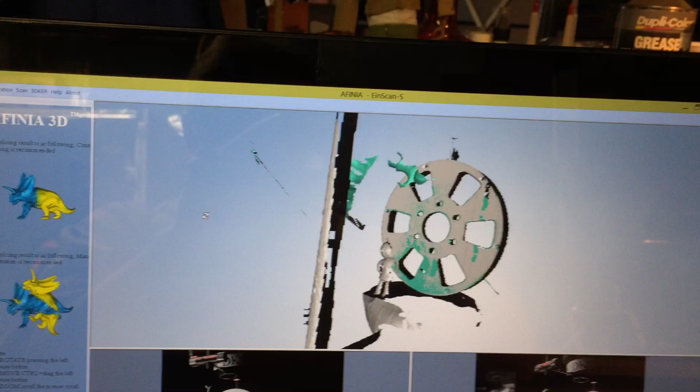Here is an Afinia 3D scanner that I'm going to be putting up for sale on eBay. I really like it. This scanner is made by Einscan - sorry, I pronounce it with my Pennsylvania Dutch accent. This is the same as an Einscan S. In fact, the software at the top says Einscan S on it, and everything that comes with it, including the dongle for the software, says Einscan on it.

This comes in a plain white box, just like a generic scanner, but you can see who it's made by. It was sold under the name Afinia 3D.

There's probably a whole series of videos I could make on this scanner. I'll show you what I'm doing with it now. I wanted to play with it a bit before selling it. I'm selling it because my main scanner is a David scanner, which has now been taken over by Hewlett-Packard - I hope that's not the demise of that scanner, because I really like it a lot. But I bought this one to play around with, and it's the exact same concept.

There's two cameras and a video projector. This scanner is actually recognized by David version 5 software, even David version 4. The difference is version 4 only picks up one of these cameras, while version 5 is capable of using two cameras - it picks up both cameras in its drop-down menu, and the video projector in here is detected too.

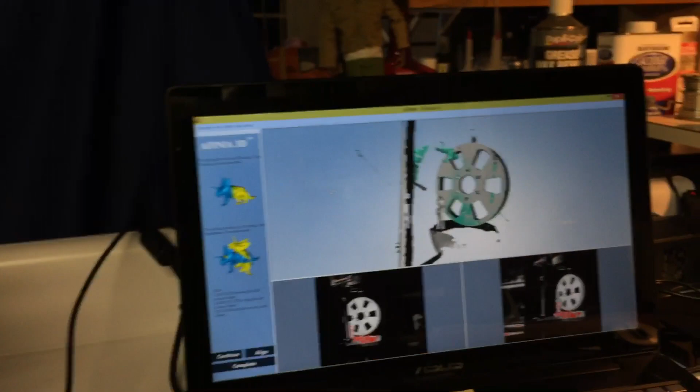But if you want to try some different software, you can probably find David version 5 on the internet and download it for free. The only difference between the free version and the paid version is that you can't save your project. You can try it out and do whatever you want, but you can't save it - so it's good for learning the software, but not much else, since you can't save what you spent all that time scanning.

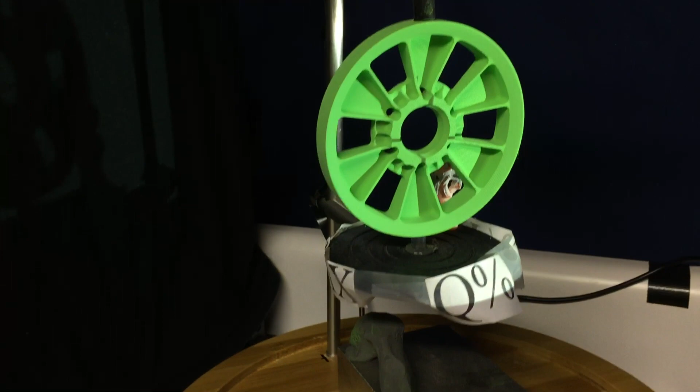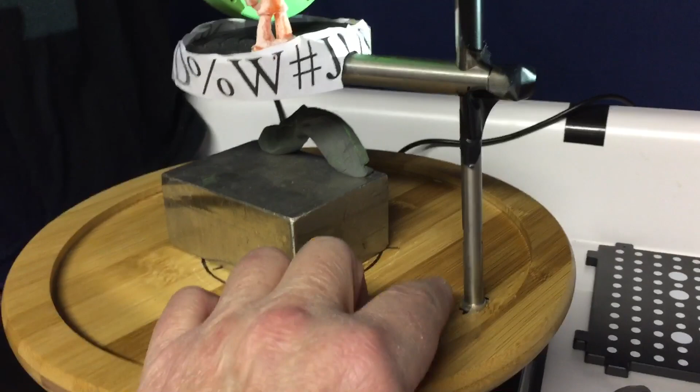Now, if you look at this mess here, you might ask what I'm doing. Well, this is my manual turntable that I was playing around with. This is just used as a weight - it's a cheap couple-dollar wooden turntable that I adapted. This piece is from a Next Engine scanner, because I have an extra one - I've also tried Next Engine scanners. This is from a Next Engine scanner where I'm holding the part.

This does not come with the Afinia Einscan scanner package. I do have the turntable, which is also marked Einscan - or whatever you want to call it, 'any scan.' So this table works fine, but in this case I've been trying to scan this wheel center.

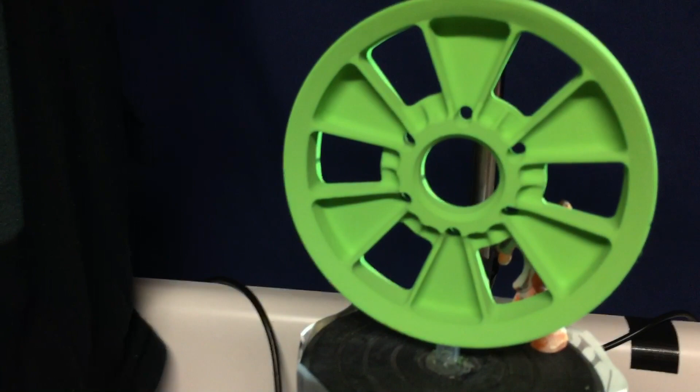This wheel center is actually made out of aluminum, and it had some reflective surfaces on it. So let me go over to my messy workbench here.

I spray the items with this - Heidi Swap spray, not Heine Swap, it's Heidi Swap. This is a chalk spray, and this stuff is great. I haven't found any difference between the colors at all - doesn't matter if you use green, white, whatever. I got green because it was cheaper, $9 a can versus $30 a can for white. I've tried many different colors, and it works great for dulling the part, and it washes right off. Hasn't damaged anything I've put it on so far.

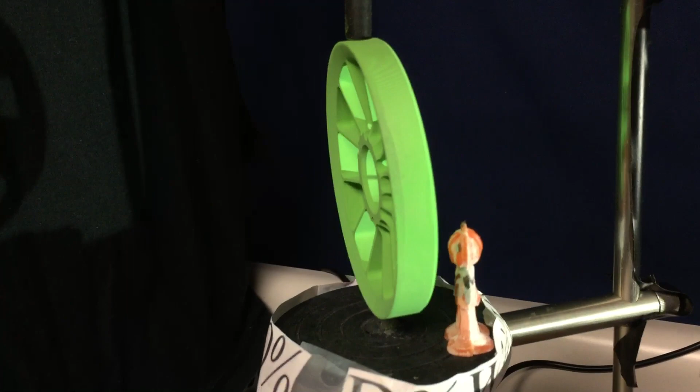So the idea of my contraption here is that I don't care much for the manual alignment in this software. So I'm putting things in the scan that are easy to remove in post-processing. Put things in that are easy to remove in post-processing, but they give the scanner something to reference to when the software does an alignment.

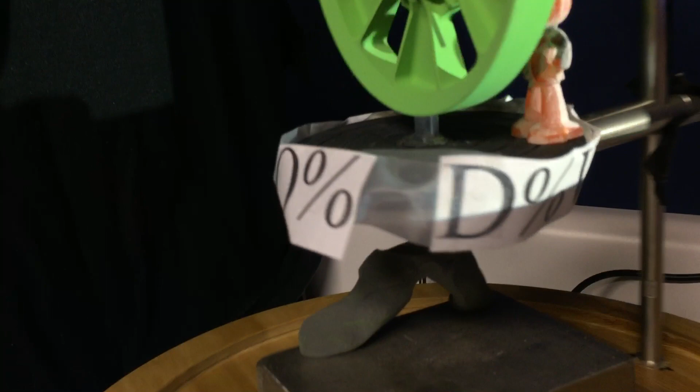This is something else I haven't seen anybody really talk about, but it works. This is just something I printed out on the computer - totally random symbols, numbers, whatever. But it helps the scanner software find items to line back up again.

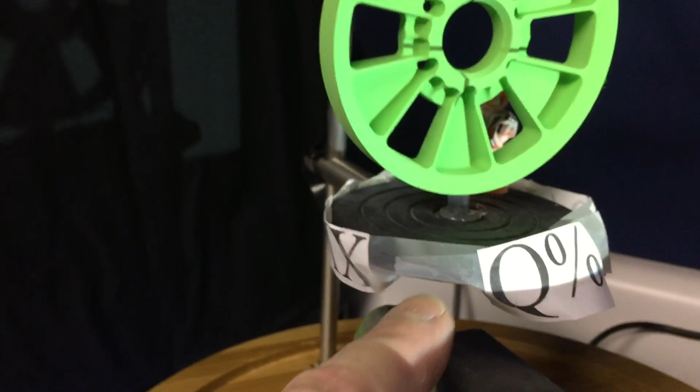I've had some problems scanning the back of this wheel, and it's because - as far as the software is concerned, since this is like a symmetrical item, the software might take this opening in the wheel and stick it over here, orienting it in any different direction. So you almost have to tell the software what to do by putting easy-to-remove items in with it. That way you're giving it reference points without putting stickers or markers on your actual item.

So I'm going to turn this light out. What I wanted to show here was a scan that I just did, and the software didn't line up correctly. So I want to show you what to do when the software doesn't line up correctly.

You can try to do a manual alignment, and there'll be instructions along here. I don't really care for their manual alignment that much. I'd rather skip off, reposition the item, and go to another scan. That seems to be a time saver.

But I'm going to show you here how not to delete your whole project. Just delete your last scan, which is denoted by this green area. This is my last scan.

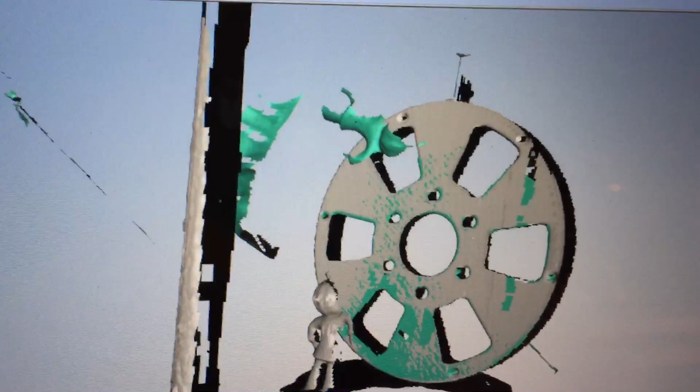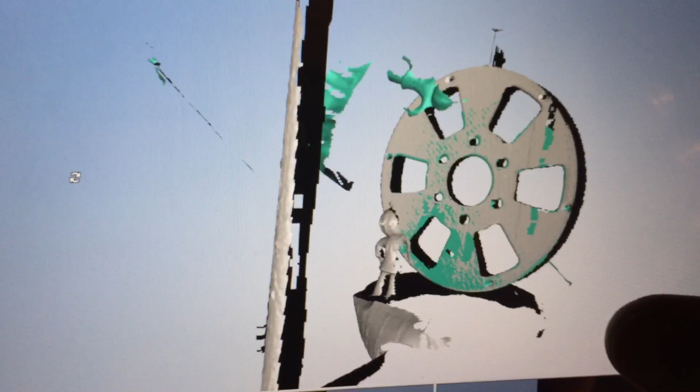The software grabbed it. It should have put the little pumpkin guy down here, but it didn't. It lined up these holes instead, since that represents the major part of the scan, and that happens sometimes with a part like this. A part like this is very difficult to scan. If you're doing a little toy soldier figure, or just the pumpkin guy, that works great because there are a lot of defining features on that item. This one is uniform in shape and really has no defining features.

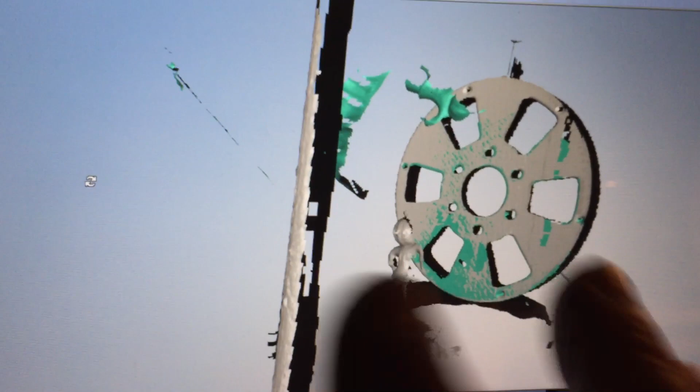So again, sorry for repeating myself, but that's why I put items in with what I'm scanning that are easy to take out, because in post-processing, when you trim this, it's easy to take out the things you don't want. Adding things into your scan is okay as long as they're not actually touching what you want to keep, because I could edit out the little pumpkin guy, but he's there for a reference point for the software.

So if I want to remove that in this software, all I need to do is click Align, and that brings me into this screen where you can place reference dots in one spot and then reference dots in the same spot.

I was just going to skip over this, and I just want to delete this last scan here. So let me think here what I do. I don't hit Complete. I clicked on Align, which brought me into this screen. Now this is your alignment screen where you can put the dots on either side.

I have to refresh my mind because I was using the David software as well. Now, when you click on Delete Model in this alignment screen, it is not going to get rid of your whole project. You don't have to start over again. You just want to get rid of that one scan that didn't align, so you click Delete Model. That's going to take you back to your screen.

Let me zoom in on this. That removed just that last scan. So we can give this a try again.

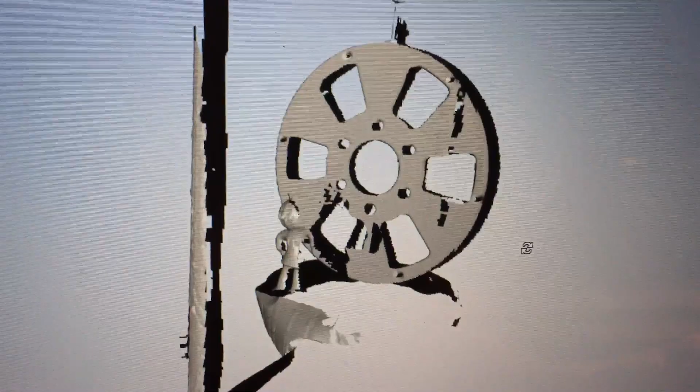I'm going to do this quick before I end the video. We're going to spin this back around and try this position. This seems to be where I'm having trouble, when I'm getting past the halfway point on the back. This is what the camera is seeing - that's what one camera is seeing, and that's what the next camera is seeing. Let's scan this and see what happens.

So we're going to click on Continue. Now we're going through the stripes of the scan. It's a structured light scanning system.

David software, which is Hewlett-Packard, works pretty much the same way - even the light patterns look the same. I've always wanted to try Flex Scan, which is another type of structured light scanning.

Okay, now the next screen's going to show me the scan it just took. When we click Next, the software is going to do an automatic alignment, and we'll see what shows up for the next picture. It didn't align it again - I can see here that it put the little pumpkin guy up here, which should be down here. So I might try a manual alignment.

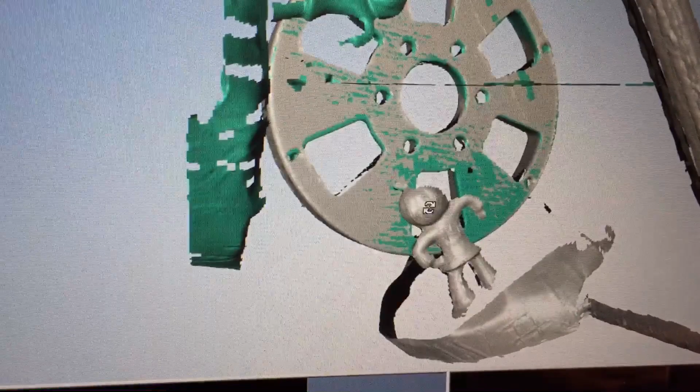I'm having problems, like I said, doing the back here. I don't know if it's because of this post I have in the way. I put some electrical tape on it to cut down on some of the shine back to the camera, thinking that was causing it.

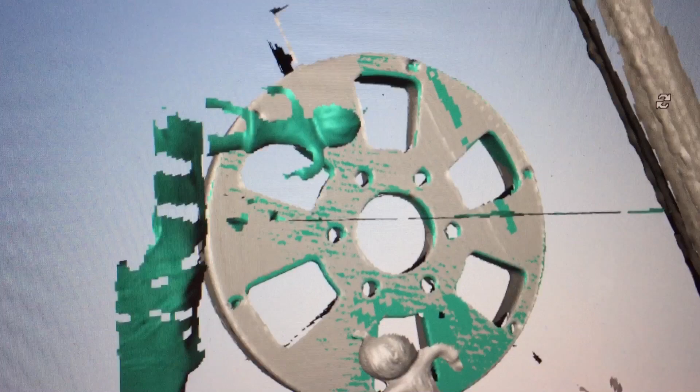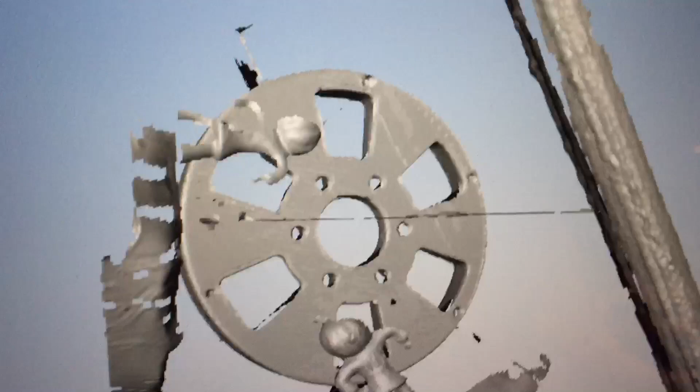So I'm at 12 minutes here. I'm going to end this video, and I'm going to show you that we could go to Align, which brings up our alignment screen. After I'm finished with this video, I am going to try that scan, that position again, and try the alignment process.

But again, we can click on Delete Model - you're not going to delete the whole model. Delete Model pretty much gets rid of that scan that did not line up, and then we can press Continue to keep going. There are a lot of great features with the software, but you've got to learn all the little tips and tricks on what to do.

Like for the alignment process, you need to hold down the Shift key and then do your left click and put on your alignment dots. You put a little dot on this stem of the little pumpkin guy's head, and then you put a dot in the exact same place over there, and do a series of 3 dots - that's how the manual alignment works with this software.

So we're at 13 minutes there. There's a little tip, a little trick for this scanner, but it really does work nice. I have gotten results with this just as good as I have with my David scanner. But you need to know all these little tricks and tips to get through some of the items you're scanning.